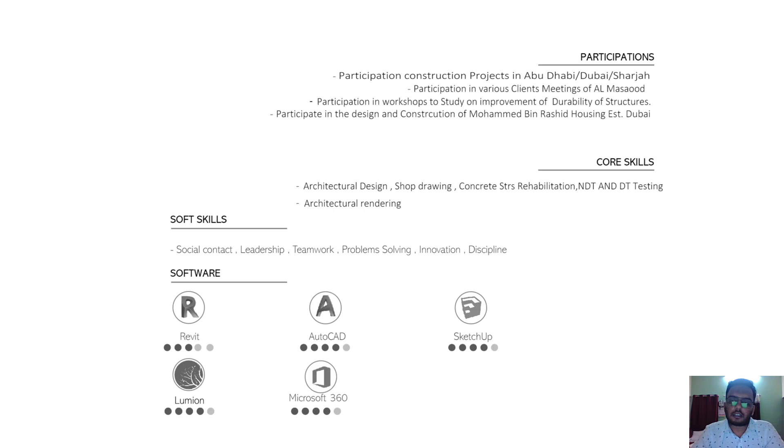So come to the content of my introduction part. Design and construction of Enhancement of Zones Corp Gas Network in Abu Dhabi. In Musaffah, we were working with Abu Dhabi Ports and KEZAD. And the second project was Binghatti Riverside Building. It was G+19 floors. This structure was a 15-year-old structure which was left abandoned during the recession.

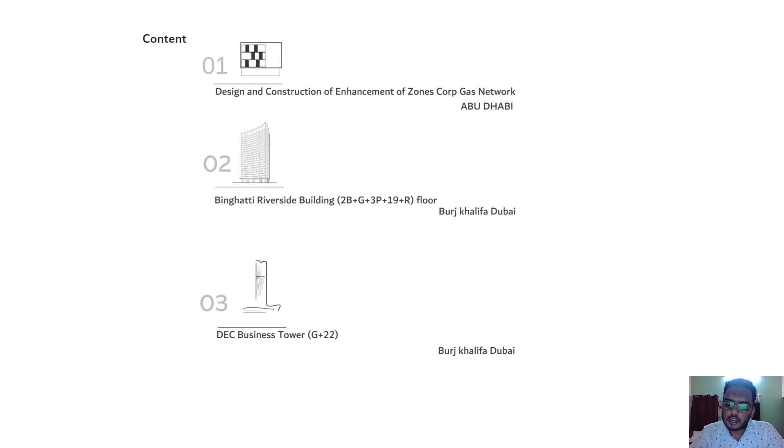And the third one is DEC Business Tower. It's a G+22 floor structure near Burj Khalifa. So this project also was left abandoned after the recession in 2007 in the construction industry. So these two projects have been restarted by their clients to complete the projects. Maybe two to three floors they have completed. After that, they are going to restart the construction and the repair work in the existing structure. So I wish the projects will complete soon and will be available for the local market.

And the fourth project is a residential building of G+8 structure. The client was Luta Real Estate Developer. It is near Sharaf DG metro station. It is a residential building. We have gone for the structural assessment of this structure for the crack injection and the delamination portion of the building. We have gone for various destructive and non-destructive tests in this structure.

So before us, Bureau Veritas, a famous, well-known third-party inspection company, was there for the testing, but due to some issues, they left that structure without testing it completely. So we completed the structural assessment of that residential building near Sharaf DG metro station.

And the fifth project is architectural, structural and MEP modification of a G+7 residential building. It was a 35-year-old building in Al Rigga area. We have gone for a lot of destructive and non-destructive tests, and we have done a lot of as-built drawings and defect mapping drawings in this structure also.

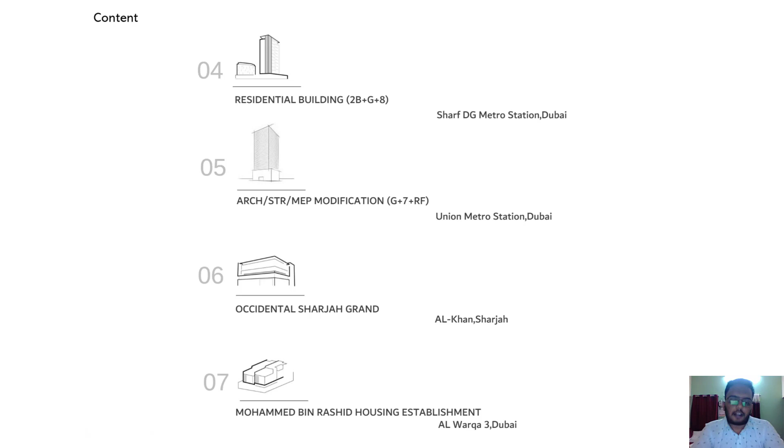So the sixth project is Occidental Sharjah Grand. This is a G+4 4-star hotel actually. We have gone for the concrete repair and structural strengthening work in this project. We have repaired a lot of defected areas like the water tank in the basement and the slab of the ground floor and basement 1 and basement 2 as well.

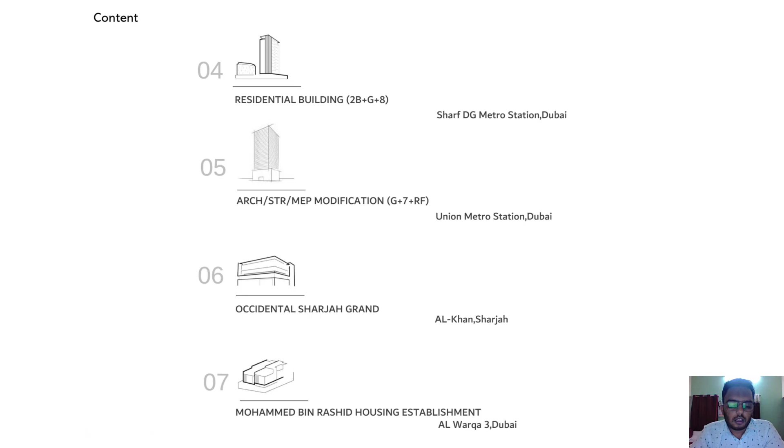The last project is Mohammed Bin Rashid Housing Establishment. This project is construction and extension of a villa in Al Warqa 3. We have gone for the structural modification of this villa.

So let's start with the first project, design and construction enhancement of Zones Corp gas network. So the location is Abu Dhabi. The type of the project is government project. So I bring a wealth of experience to the table as a seasoned civil inspector. I was working as a civil inspector there.

And also we have gone for visual inspection, like we have inspected the width of the cracks and the length of the cracks in the building. And using GPR, we have scanned a lot of structural members. We took samples of concrete for the chloride test, and we have tested the shear walls in the structure for the probability of corrosion.

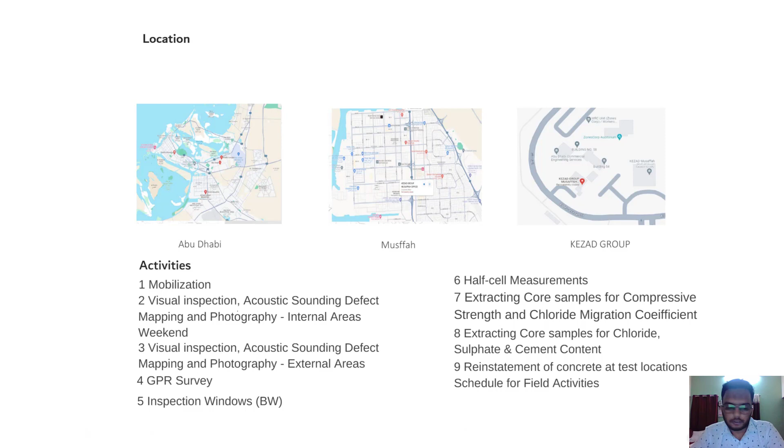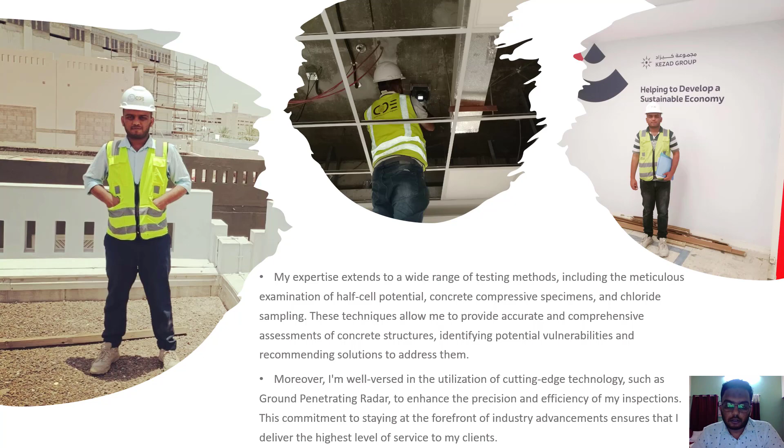My expertise extends to a wide range of testing methods, including the meticulous examination of half cell potential and chloride sampling. Now let's speak about Binghatti Riverside Building. As a civil project engineer at Binghatti Riverside Building, my specialization is in concrete repair and structural strengthening. I conducted essential tests like half cell potential and carbonation test on the concrete, on the shear wall, and ground penetration.

So let's speak about the activities we have performed there. The site location is near Burj Khalifa. So mobilization, visual acoustic sounding, visual inspection, defect mapping, photography, internal areas and external areas, ground penetrating radar survey, and half cell potential. We have noticed that there are a lot of defected areas near the shear wall of the staircase, and a lot of cracks on the slab of the ground floor.

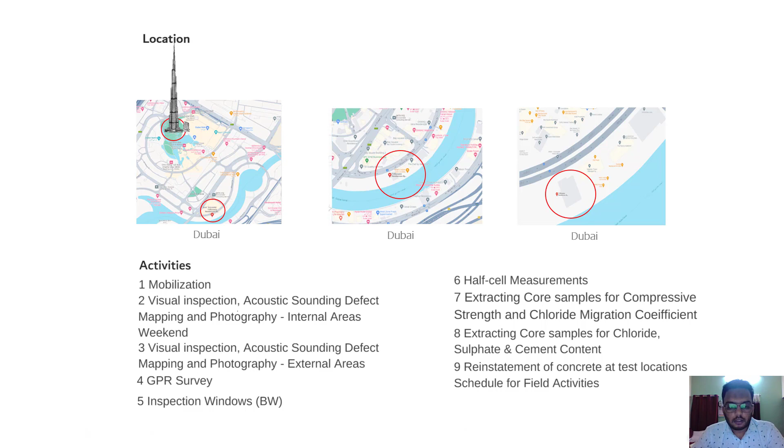As we can see, we have gone for the injection work for the cracks on the slab of this building. We have gone for the concrete repair works at the ground floor slab and the shear wall of the staircase and the lift. We have utilized high performance concrete in the repair work, which is Mapegrout TME05, the local concrete which is available there. The strength of the concrete is 65 Newton per mm square. And safety standards remained unwavering.

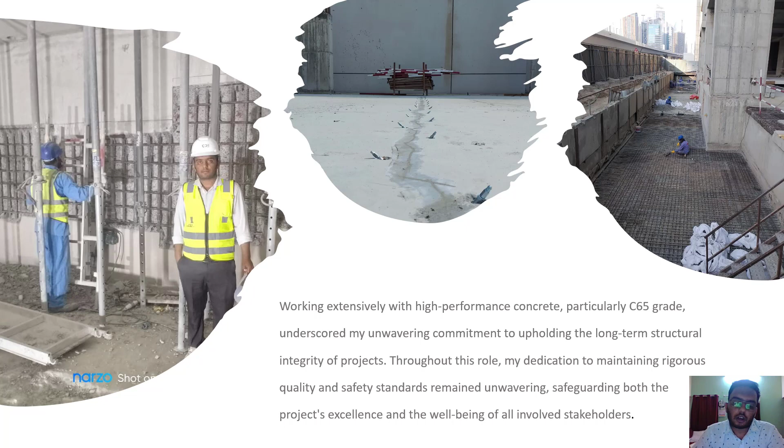Then we have utilized a lot of epoxy resin and hardener for the injection work, and the Mapegrout ME05, MAP-T60, structural repair mortar, Planiseal 88. All these structural repair and strengthening materials we have utilized in the structure to enhance the structural integrity and the repair work. So the third project, DEC Tower.

DEC Tower is situated in the Business Bay area. They are constructing a G plus 22 story building. During my tenure, I was involved in DEC Tower as a civil inspector, specializing in construction and concrete repair. My responsibility encompassed frequent site visits to conduct inspections, particularly focused on high performance concrete of grade C65. It's nothing but Mapegrout ME05, which is locally available in the market.

We have noticed a lot of defected areas and repair patches adjacent to the column at the top of the slab, and a lot of injection work also. So as we can see in the column, we have gone for the inspection of the surface preparation. In this, we have noticed a lot of defected and corroded steel on the column. So we have gone for the repair and provided additional steel if there is more than 15% loss in the cross section of the steel due to corrosion.

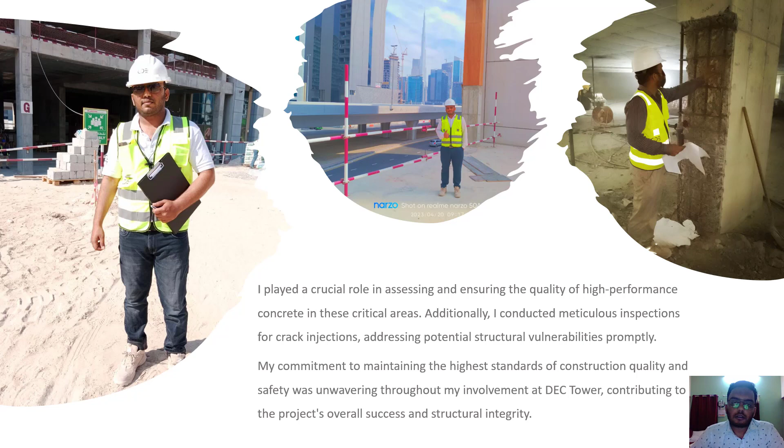So let's speak about my fourth project, residential building G plus 8. It is a Luta real estate developer's property. In my role as a civil inspector for this structure, I specialize in conducting comprehensive durability assessments. This involved expertise in identifying and evaluating various issues such as crack marking, delaminated areas, leak areas in the basements due to the surrounding infiltration and penetration of water, and the leakage of water.

There are a lot of leak areas. Then I have also examined the heavy spall in the slab of the structure. I think it was a P1 slab, parking one or podium one, I think.

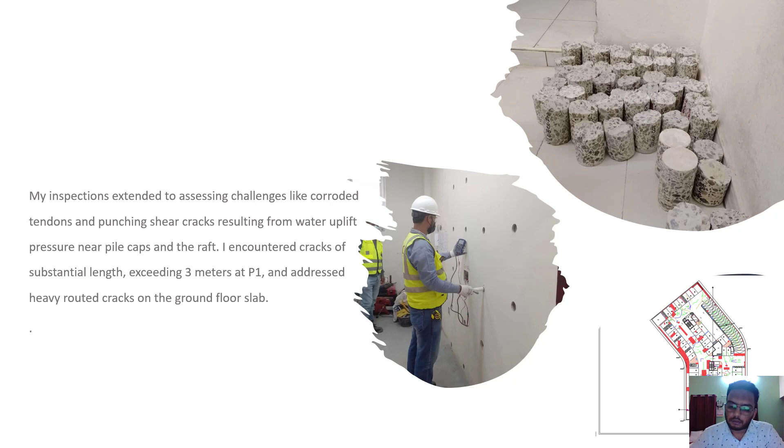So I have seen there is a lot of spalled area at the bottom of the structure, and I have noted the routed cracks, as you can see in the photo. So we have taken a lot of core samples, and we have gone for the half cell potential test in various locations of this structure.

We have noticed that there is a crack of length exceeding 3 meters and 4 meters also at the parking one or podium one. We addressed heavy cracks, and we have also addressed the heavy cracks on the ground floor. That's called routed cracks. You can notice the drafted file, the AutoCAD file, is attached with this PPT for the representation of the cracks and the delaminated portions of various widths and various defects.

Now let's speak about the fifth project, architectural, structural and MEP modification. This project is situated near Union Metro Station, not Sharaf DG Metro Station. This is a G+7 structure. This is a residential building where the tenants are there. When we went to this location, we noticed that in the parking there are a lot of cracks in the first floor slab. There are a lot of cracks at the bottom of the beams. Horizontal cracks are there, and there is a lot of spalling in the beams and the slab area.

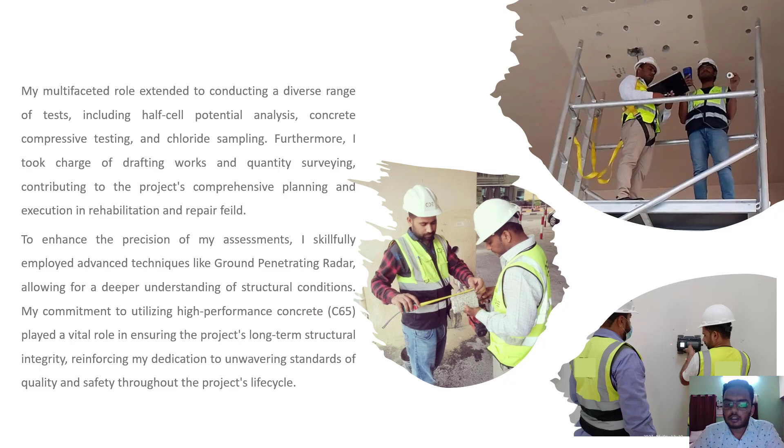So we have gone for the half cell potential. We have collected a lot of core samples from this structure. We went to 5 to 6 flats. We examined the 5 to 6 flats for the defect mapping and the spall detection, and we noted all the defects in the structure. We have gone for the quantity surveying of this project. We have estimated all the quantities, how much concrete and repair material is required to repair and rehabilitate this structure.

So now let's speak about my sixth project, Occidental Sharjah Grand. Occidental Sharjah Grand is a 4-star hotel. In my capacity as a civil site engineer, I bring to the table extensive hands-on expertise in the field of concrete repair and structural strengthening. This project was my life-changing project in the United Arab Emirates. In this project, I worked under E-Force Engineering Consultancies and Al Masaood Group.

Here I learned what concrete repair and structural strengthening are, the exact meaning of patch repair, the exact meaning of concrete repair and structural strengthening. My specialization revolves around the application of high performance products, with a notable proficiency using Mapegrout ME05, which is C65, 65 Newton per mm square, and the structural repair mortar Mapegrout T60.

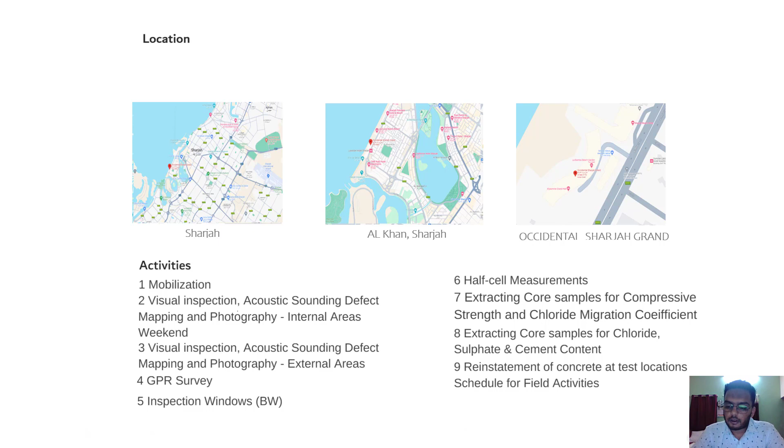Now let's speak about my roles and responsibilities. At this site, we have gone for the chipping of a slab. You can see at the bottom of the slab we have gone for the chipping. We have gone for the micro concreting work. These are critical areas where, if you go for the concrete work, you have to be careful. So we drilled 3 holes from the top of the slab: one is for the air, the second is for pouring the concrete, the third is to see whether the concrete level is filled. We drilled 3 holes while pouring the Mapegrout ME05, the high performance concrete.

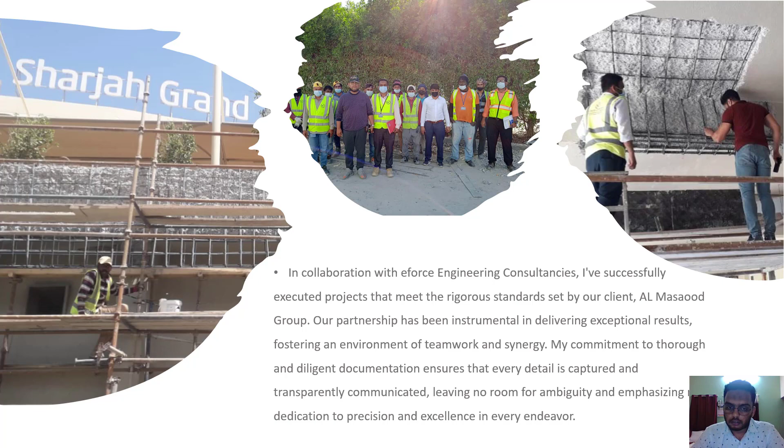So we have done a lot of repair and strengthening work in the basements. As you can see, in the shear wall we have gone for the micro concreting work. We have gone for the surface preparation. We have repaired a water tank, and we have repaired a beam. As you can see, it's around 4.5 meters high. Actually it is a basement, but from the raft foundation, the height of that basement floor is 4.5 meters.

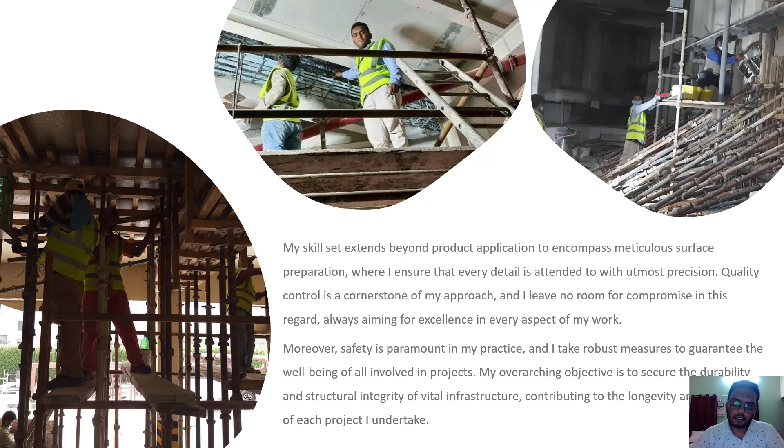As you can see, we have applied the anti-corrosion mortar to avoid further corrosion in the existing reinforcement. Then we have applied additional reinforcement to give strength to the building. Then we have gone for the micro concreting work.

So let's speak about the Mohammed bin Rashid Housing Establishment Program. In my capacity as a civil site engineer, I played a pivotal role in the construction and extension of villas, contributing to the successful completion and overall excellence. As you can see, we were doing concrete work at the site. We utilized Mapei Eporip as the bonding agent between the old concrete and the new concrete, and we have done a lot of extension work in this structure, extension and repair work also.